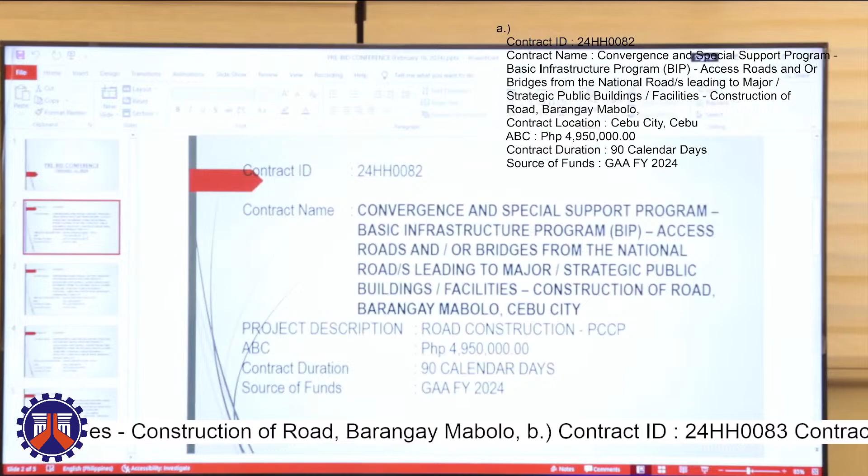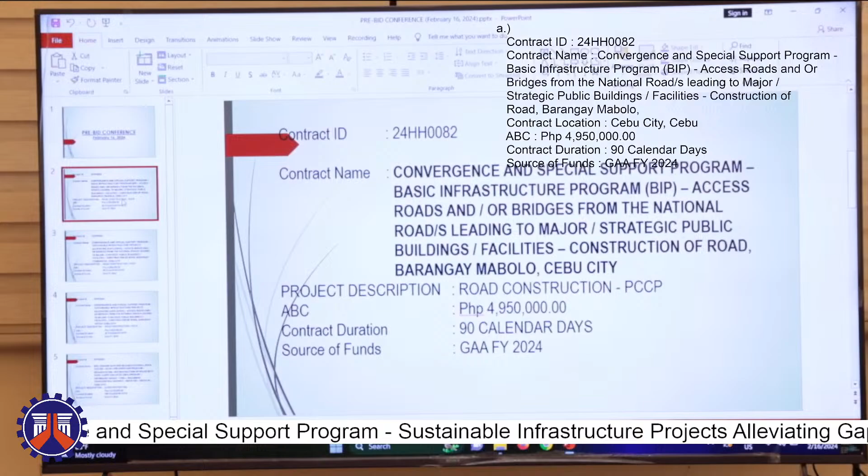First, for contract ID 24HH0082, with contract name Convergence and Special Support Program, Basic Infrastructure Program, Access Roads and/or bridges from the national roads leading to major strategic public buildings and facilities, construction of road, Barangay Mabolo, Cebu City, with ABC amounting to 4,950,000 and contract duration of 90 calendar days.

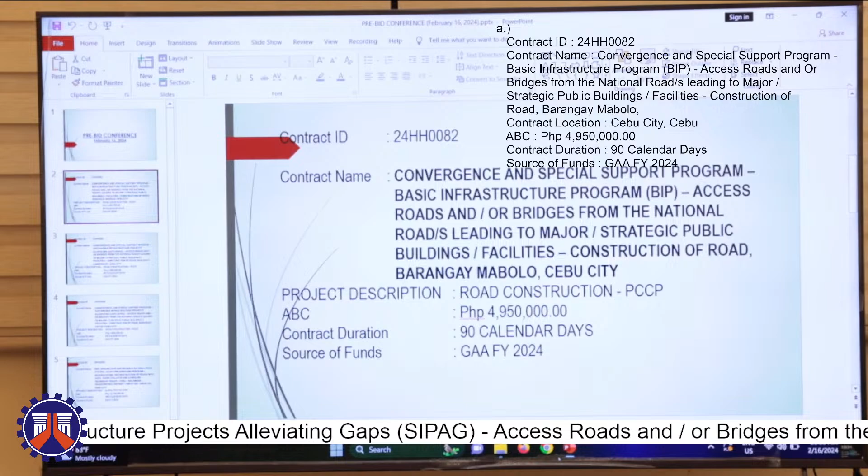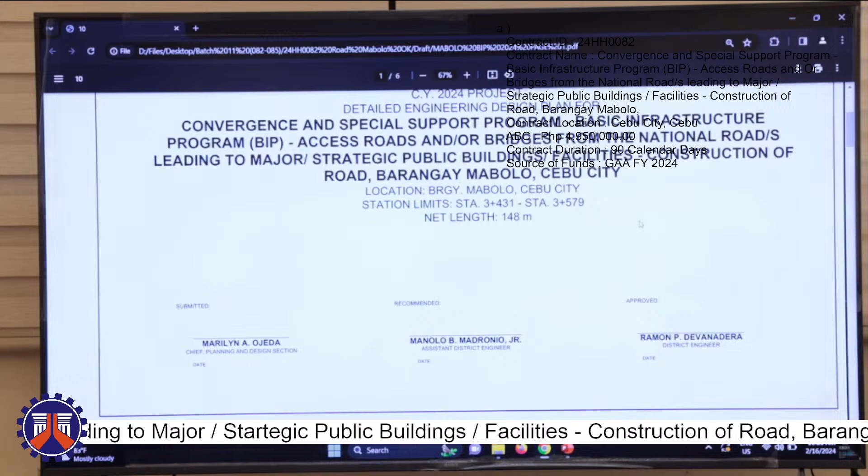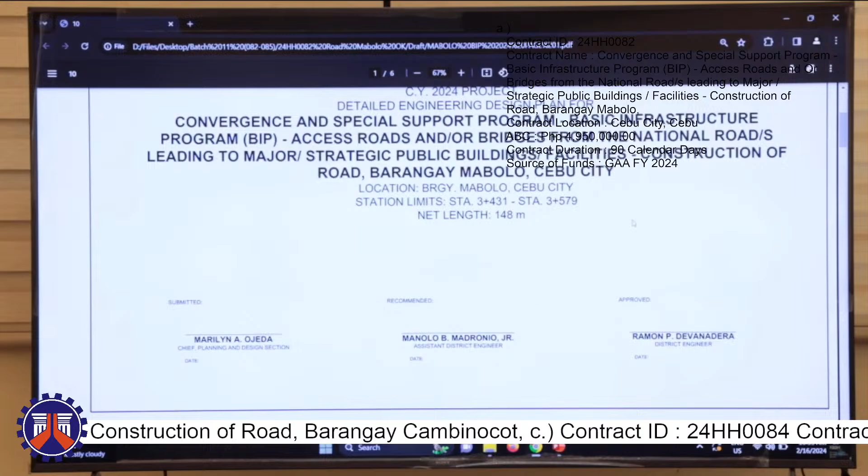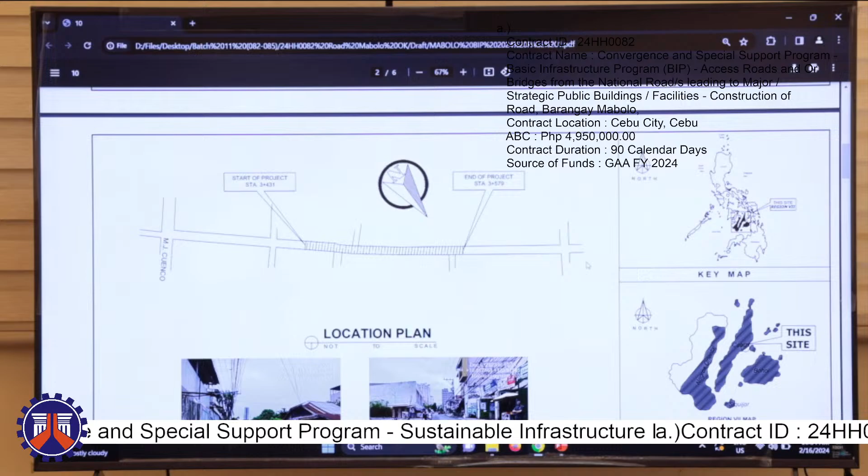For the detailed design plans, we have station limits from 3,431 to 3,579, with a net length of 148 meters. The location connects to the last project, I think from 2022 and 2021. It passes near the area of BDO and Metrobank in Mabolo.

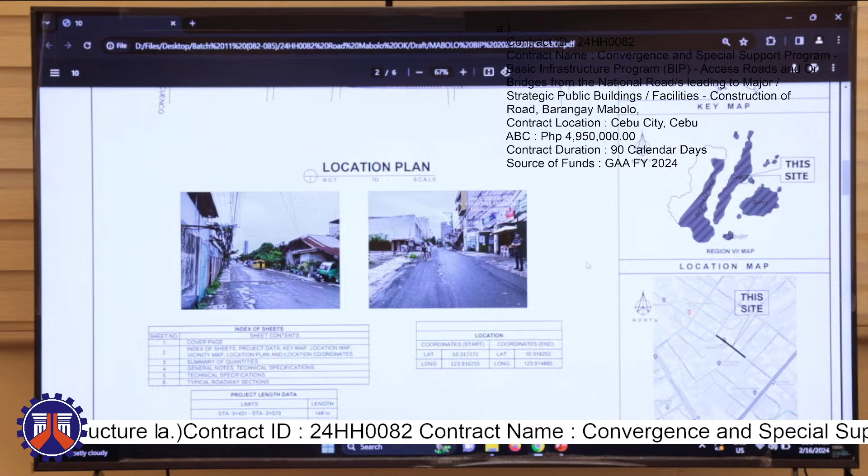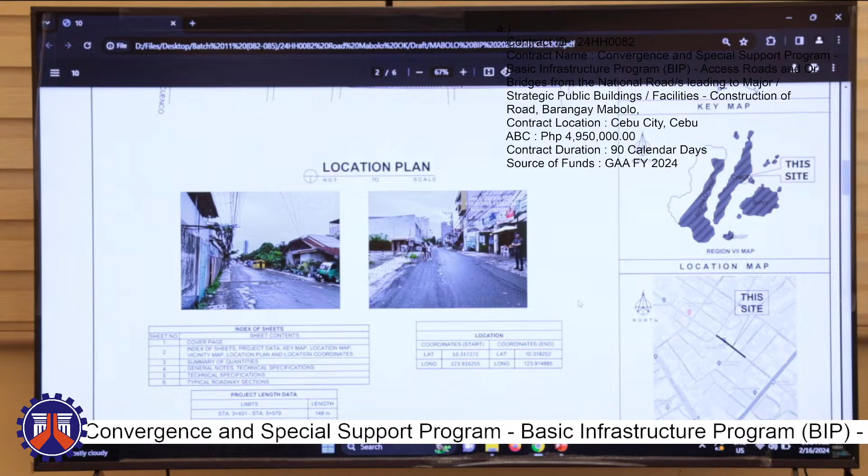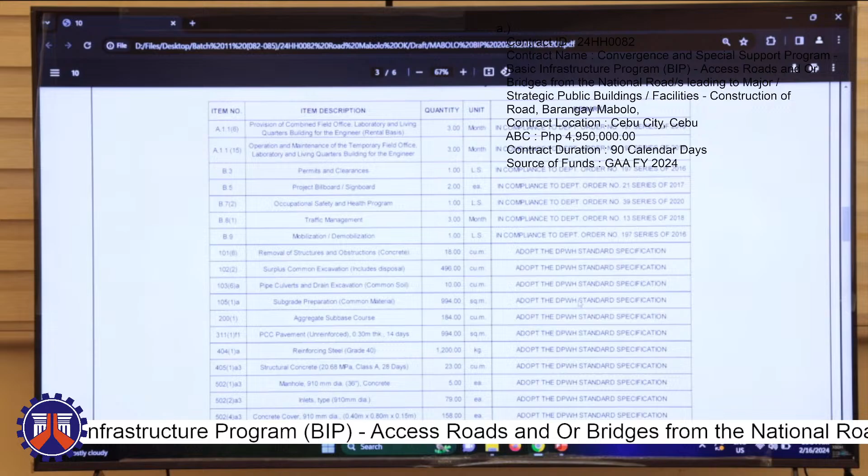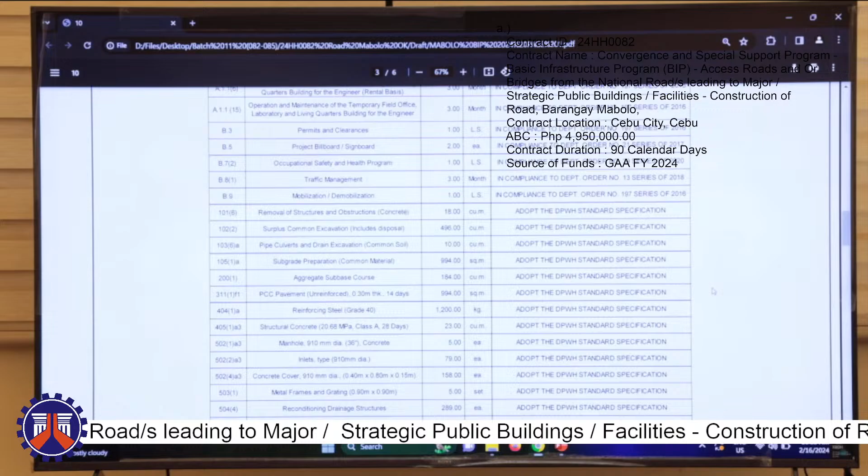If the contractor wants to visit, they can go to this location using the coordinates, or they can coordinate with the planning office to be accompanied. For the summary of quantities: provision of combined field office, operation and maintenance of the temporary field office, permits and clearances, project billboards, occupational safety and health program, traffic management, mobilization, demobilization, removal of structures and obstructions, surplus common excavation, pipe culverts and drain excavation, subgrade preparation, aggregate subbase course, PCCP with 300mm thickness, reinforcing steel bars, structural concrete, manholes, inlets, concrete cover, metal frames, reconditioning of drainage structures, and lastly the curb and gutter.

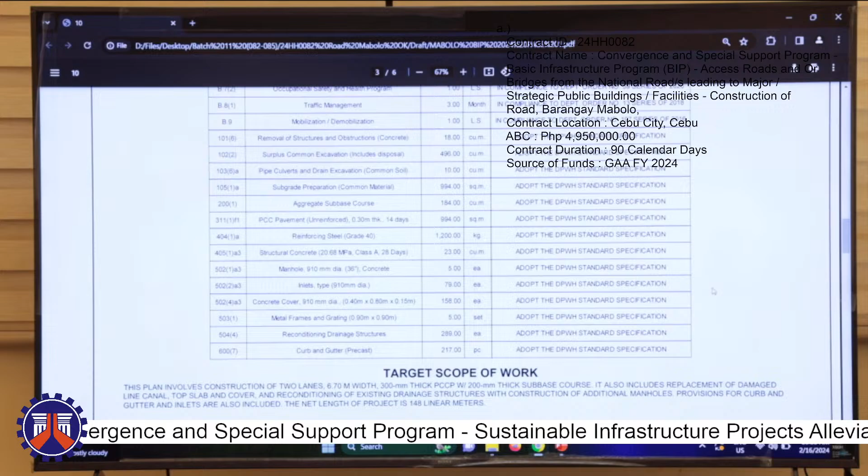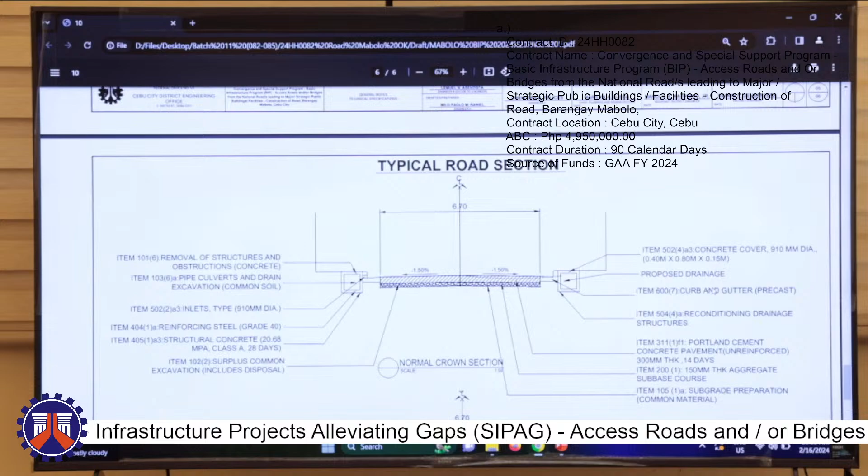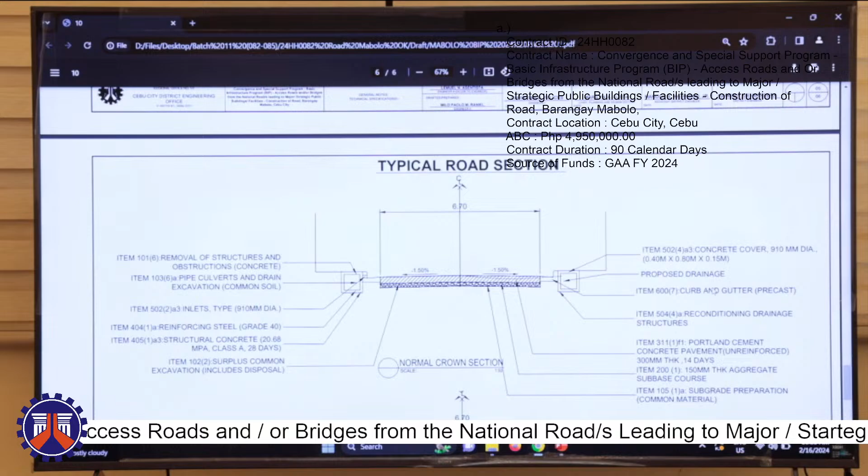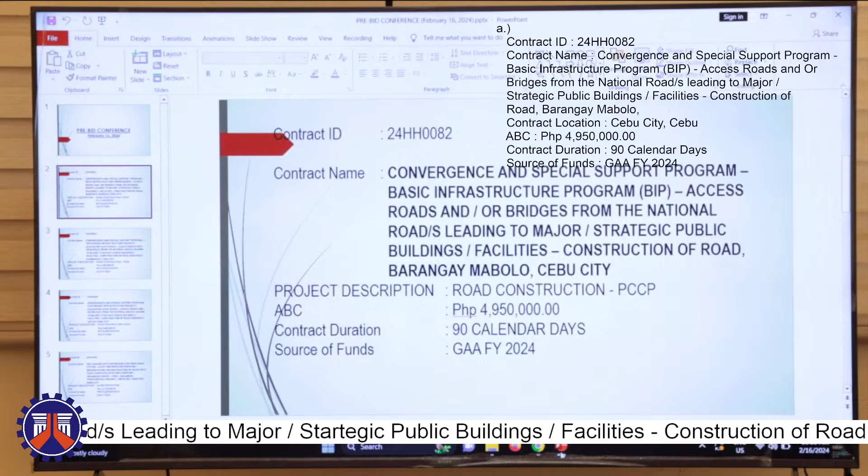For the typical cross-section, we have a 6.7 meter width for our PCCP, and we also have curb and gutter on both sides, as well as our drainage system. That's for contract ID 24HH0082. Let's go to the next project.

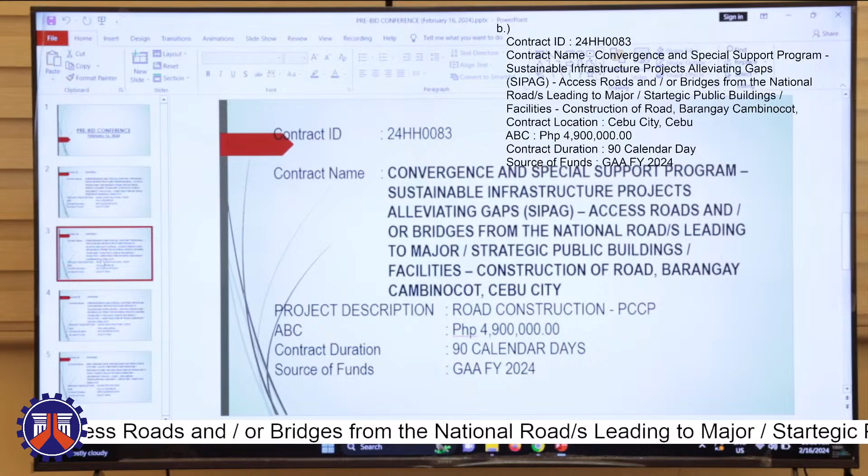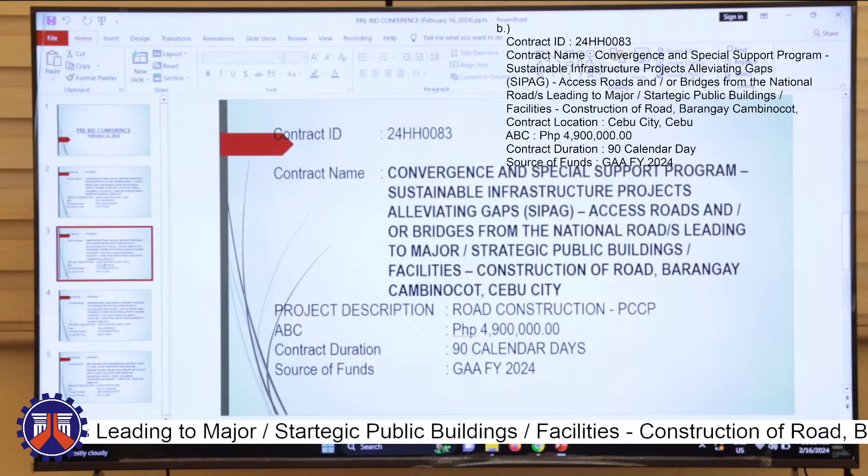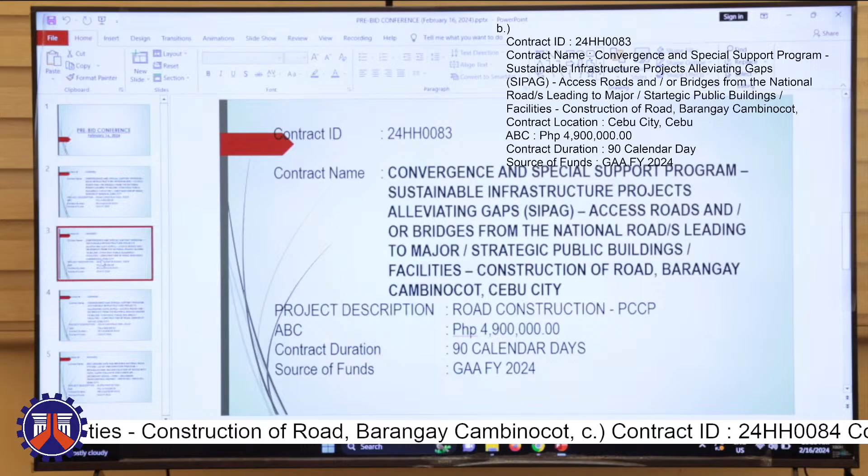Contract ID 24HH0083, with contract name Convergence and Special Support Program, Sustainable Infrastructure Projects Alleviating Gaps, Access roads and/or bridges from the national roads leading to major strategic public buildings and facilities, construction of road, Barangay Cambinocot, Cebu City. We also have an ABC of 4,900,000 with a contract duration of 90 calendar days.

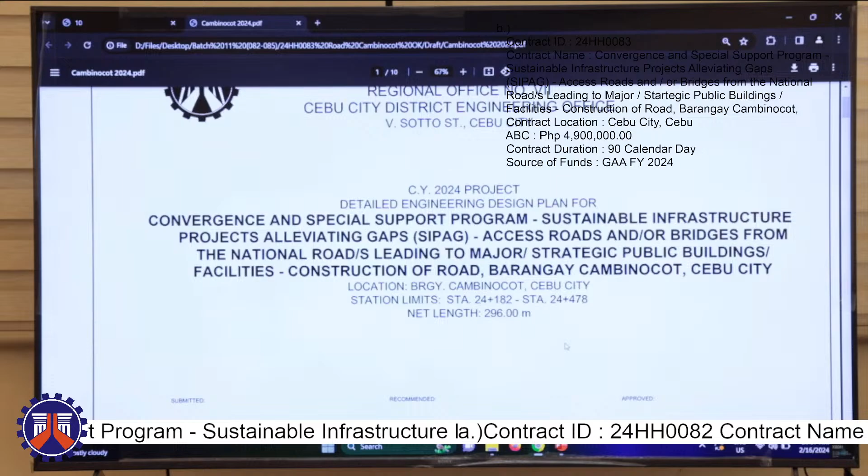For the detailed design, we have station limits of 24,182 to station 24,478, with a net length of 296 meters. For the location, we don't have well-known establishments nearby. This connects to our 2021, 2022, and 2023 projects, ahead of where the Barangay Hall is.

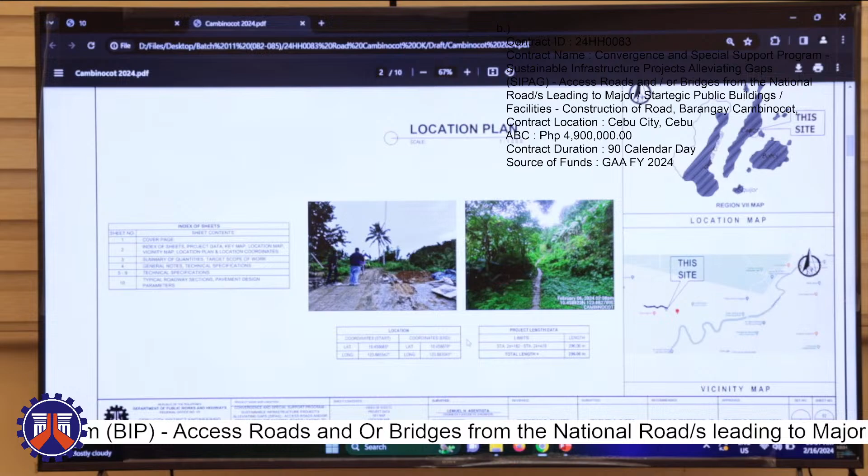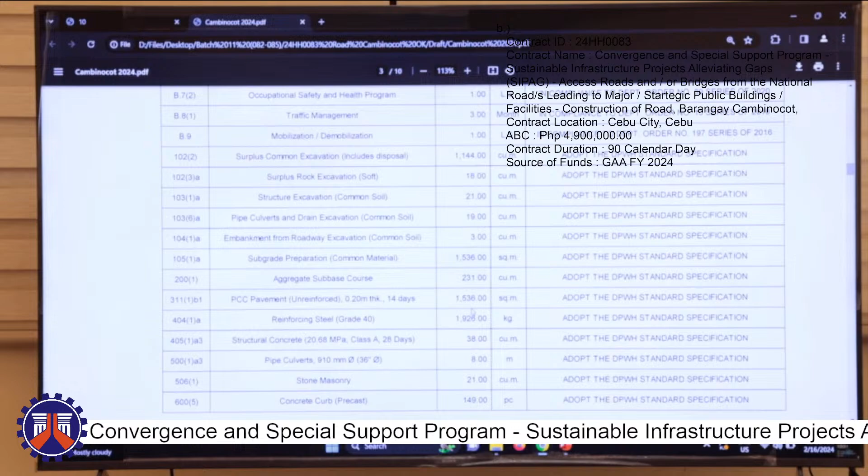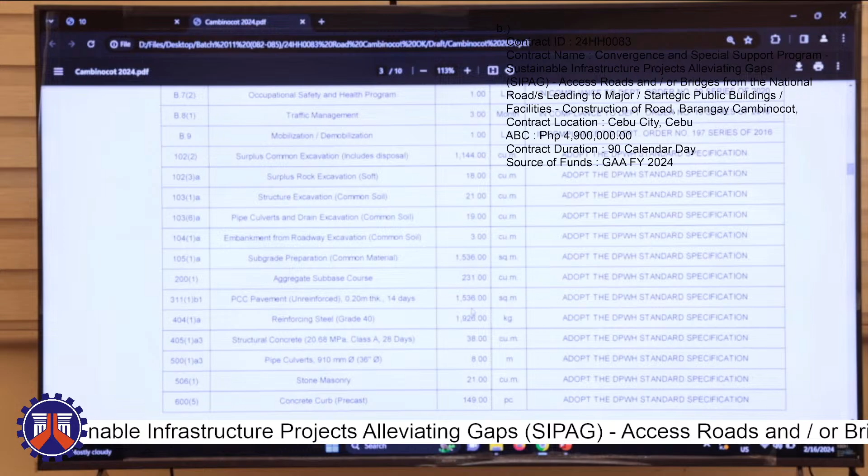As I mentioned earlier, we have coordinates for the location if ever the contractors want to inspect or do a site visit, and they can also ask someone from planning to accompany them. For the summary of quantities: provision of combined field office, permits and clearances, project billboards, occupational safety and health program, traffic management, mobilization, demobilization, surplus common excavation, surplus rock excavation, structure excavation, pipe culverts and drain excavation, embankment from roadway excavation, subgrade preparation, aggregate sub-base course, PCCP pavement 0.2 meter thick, reinforcing steel bars, structural concrete, pipe culverts 36 inches diameter, stone masonry, and concrete curb precast.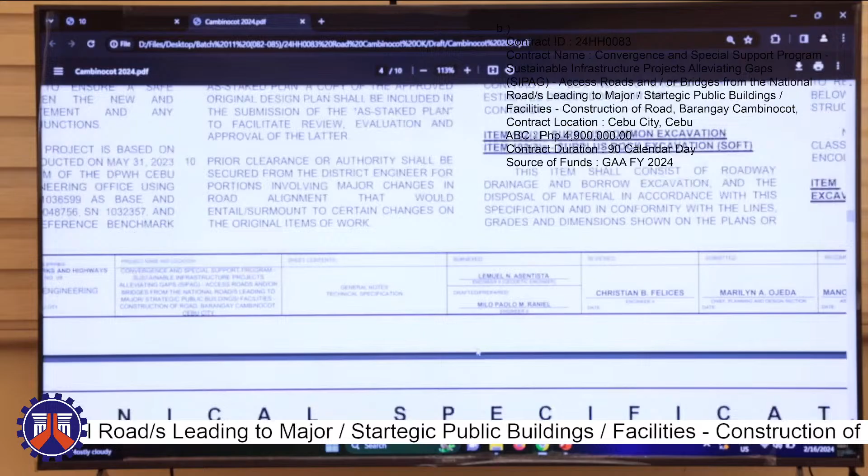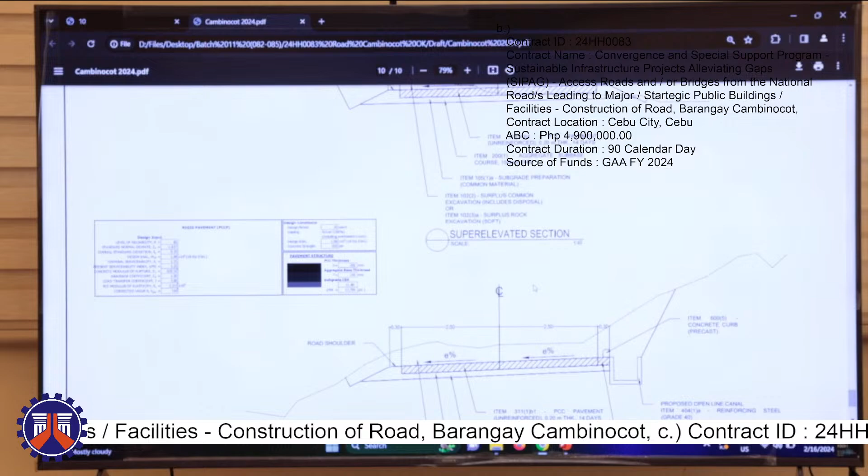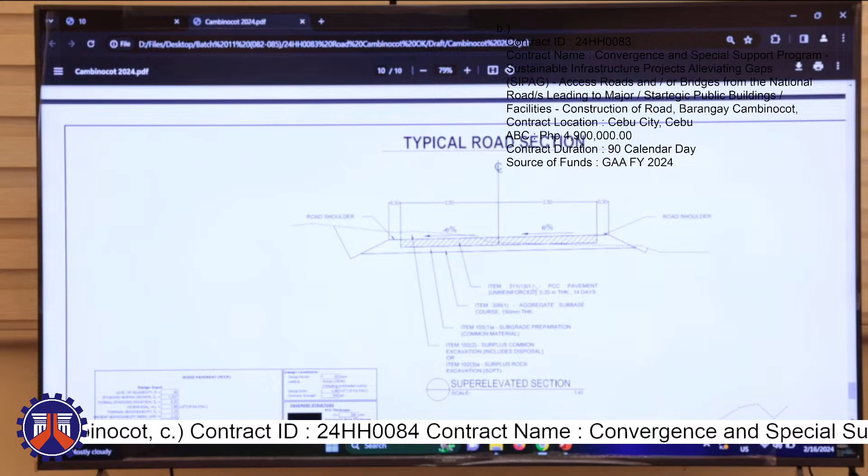So for the typical road section, we have a 5 meter width, then we have a side ditch, and we also have a road shoulder of 0.3 meters.

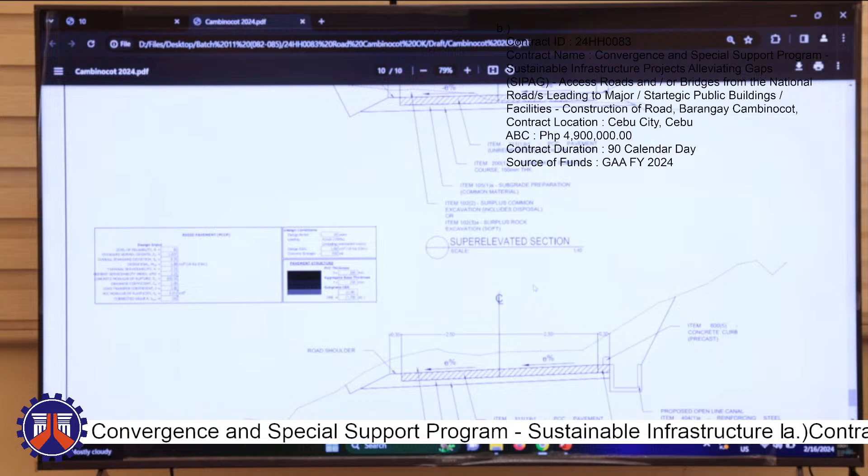Okay, we also have some portion of the projects. We also have the open line canal at the side with concrete curb, precast.

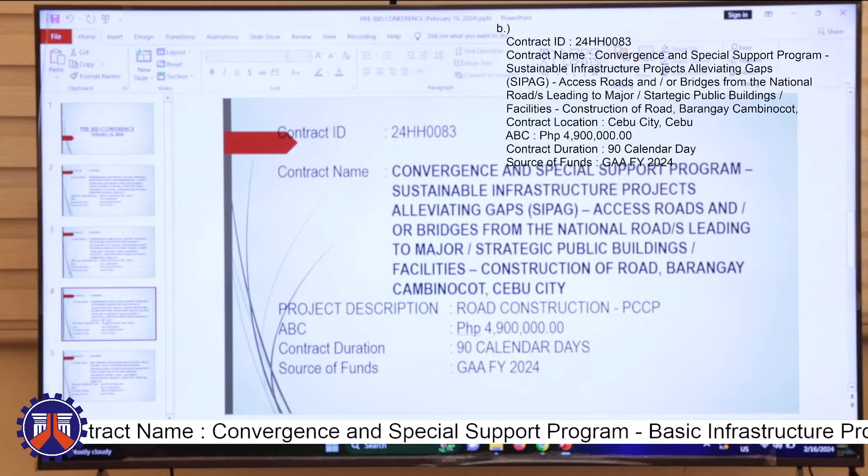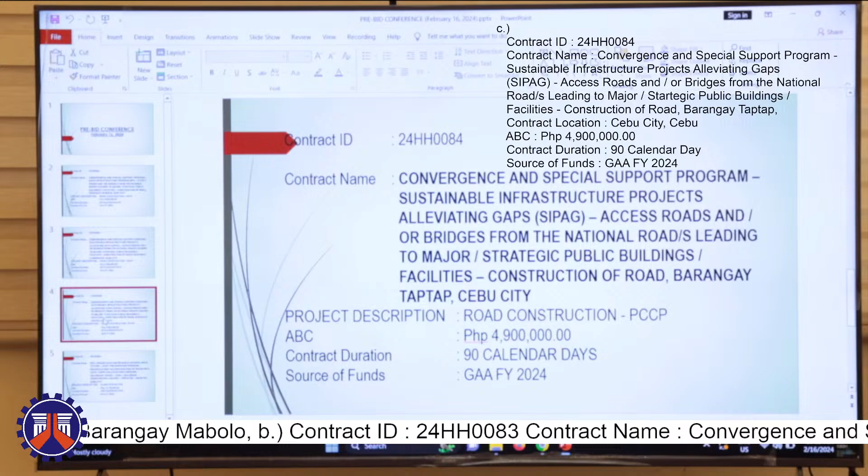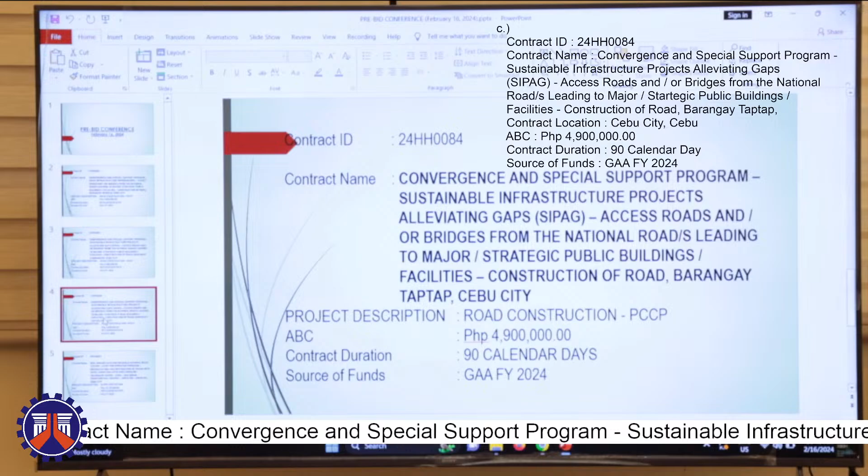Convergence and Special Support Program, Sustainable Infrastructure, projects alleviating gaps, access roads and or bridges from the national roads leading to major strategic public buildings and facilities, construction of road, Barangay Taptap with ABC amount of 4,900,000. Contract duration 90 calendar days.

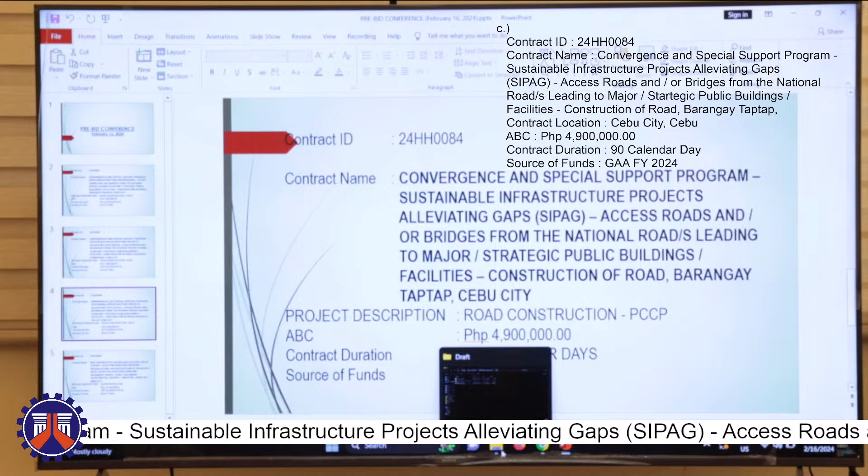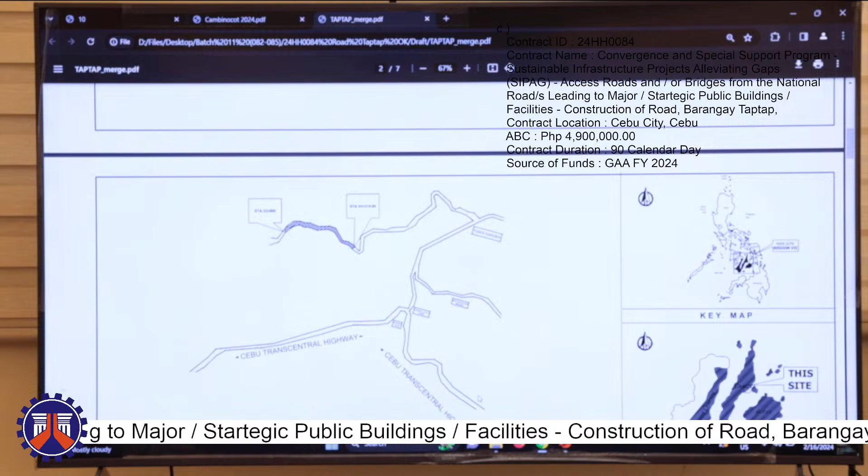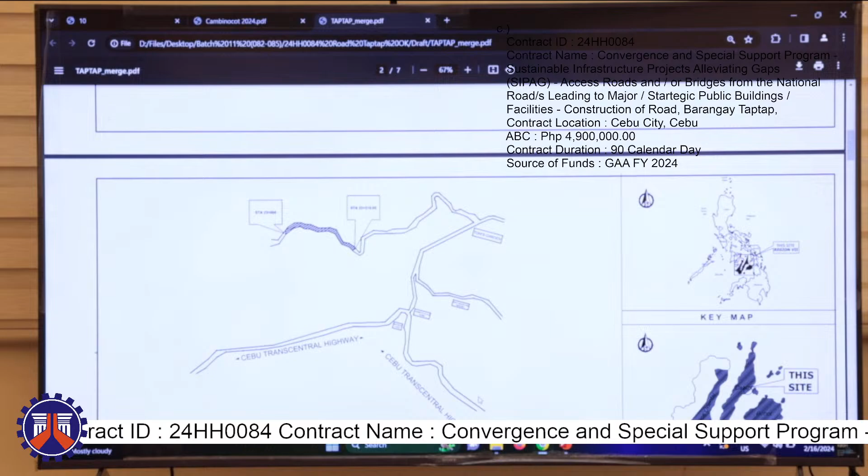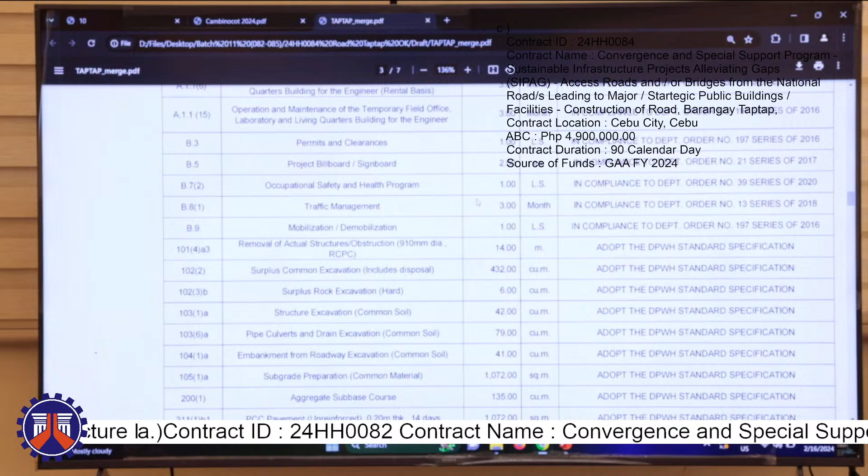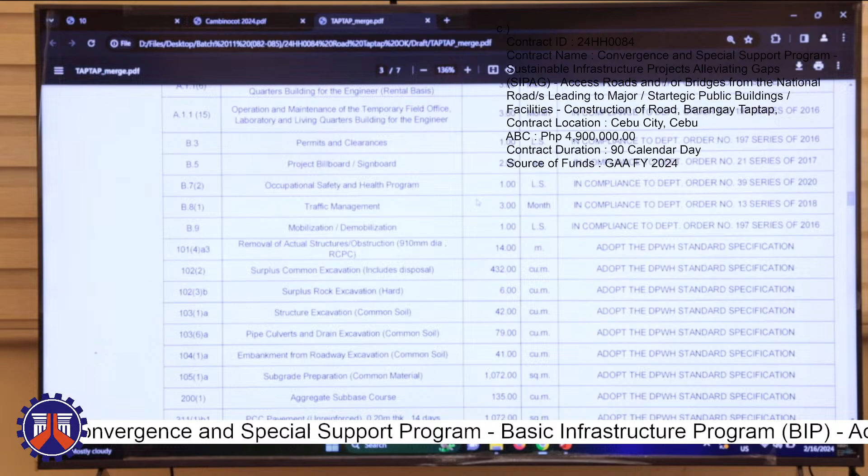So for the summary of quantities, we have provision of combined field office, operation and maintenance of temporary field office, permits and clearances, project billboards, occupational safety and health program, traffic management, mobilization, demobilization, removal of actual structures, obstruction, 910 mm diameter RCPC, surplus common excavation, surplus rock excavation, structure excavation, pipe culverts and drain excavation, embankment from roadway excavation, subgrade preparation, aggregate sub-base course, PCCP 200 mm thick, reinforcing steel bars, structural concrete, pipe culverts 36 inches diameter, stone masonry, and concrete curb precast.

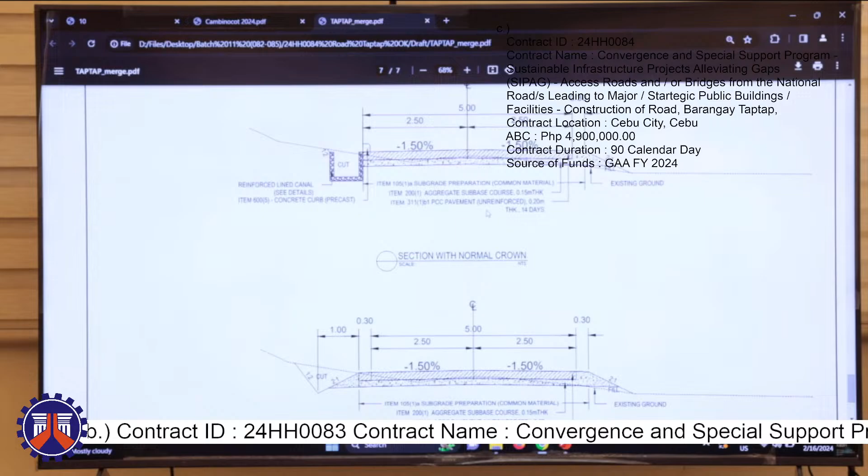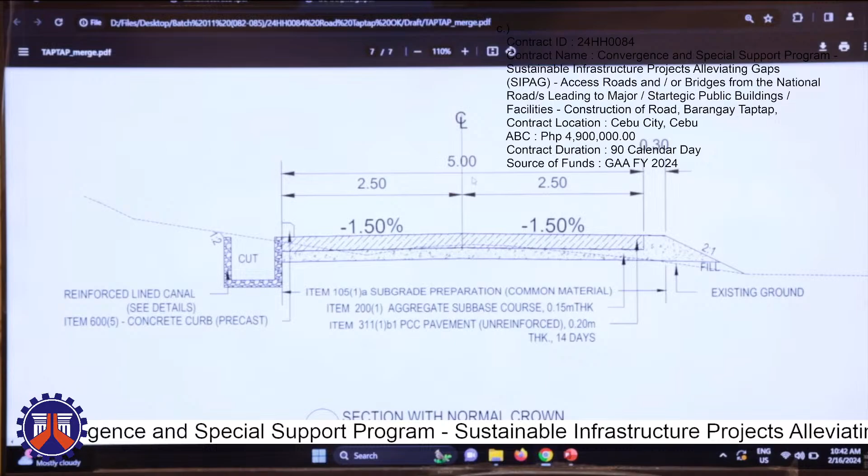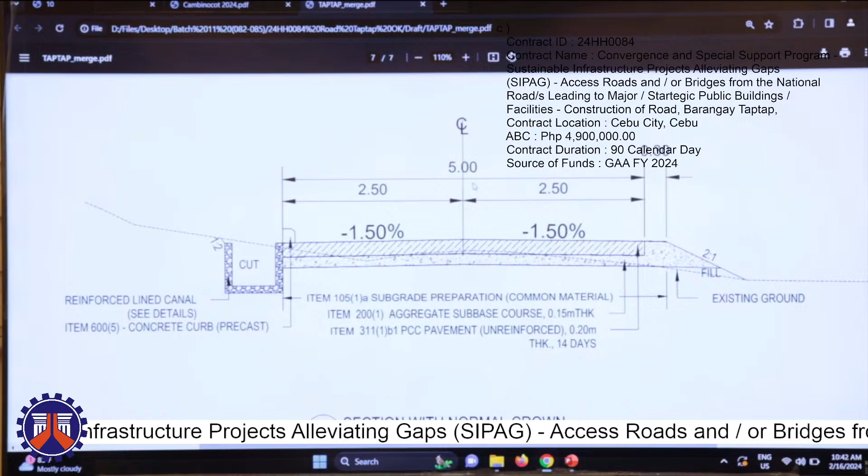Okay, this is our typical road section. We have 5 meter width. We also have a reinforced lined canal at the left side, with precast concrete curb. And also on the right side we have a 0.3 meter shoulder, then a side ditch. There is a picture.

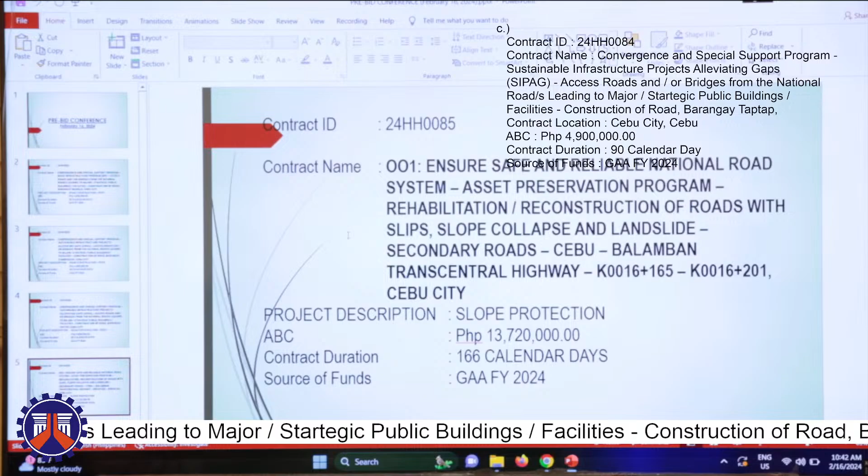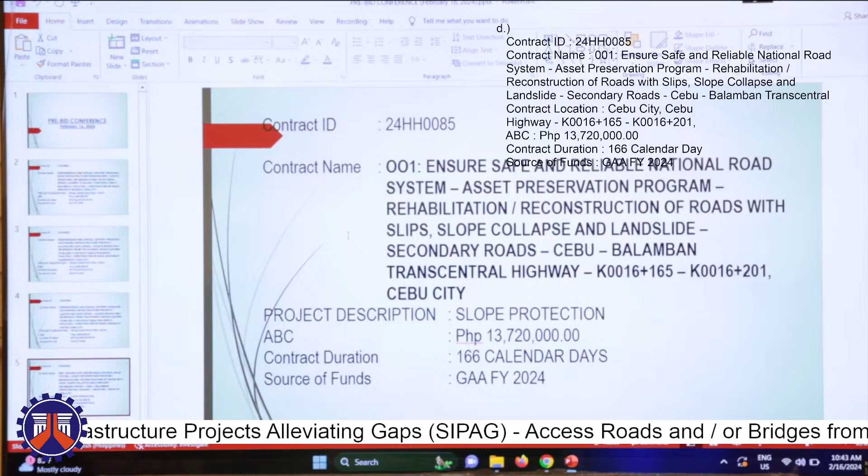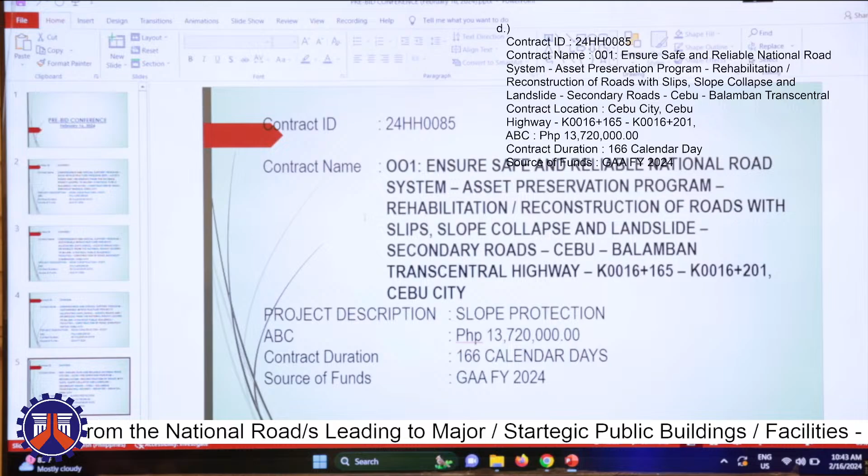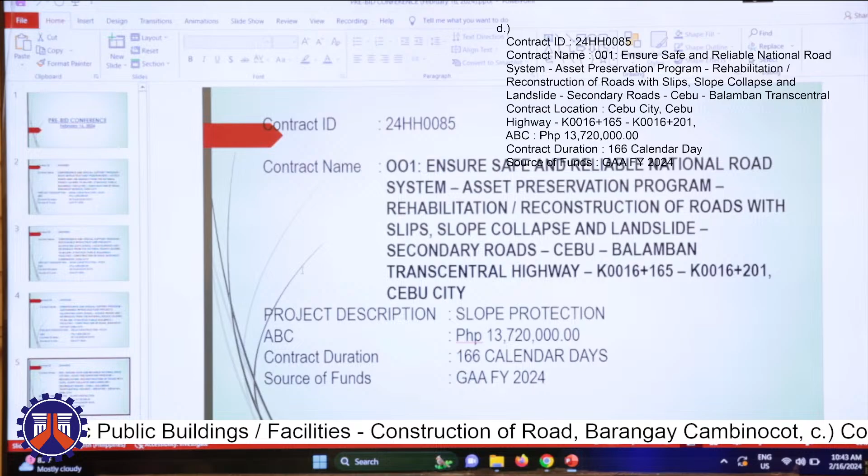For the last project, contract ID 24HH0085, ensure safe and reliable national road system, asset preservation program, rehabilitation, reconstruction of roads with slips, slope collapse, and landslide, secondary roads, Cebu, Balamban, Transcentral Highway, kilometer 16,165 to kilometer 16,201. Project description: slope protection, ABC amount of 13,720,000 with contract duration of 166 calendar days.

For the DED, okay, so the station limits are kilometer 16,165 to kilometer 16,201. So the net length is only 36 meters.

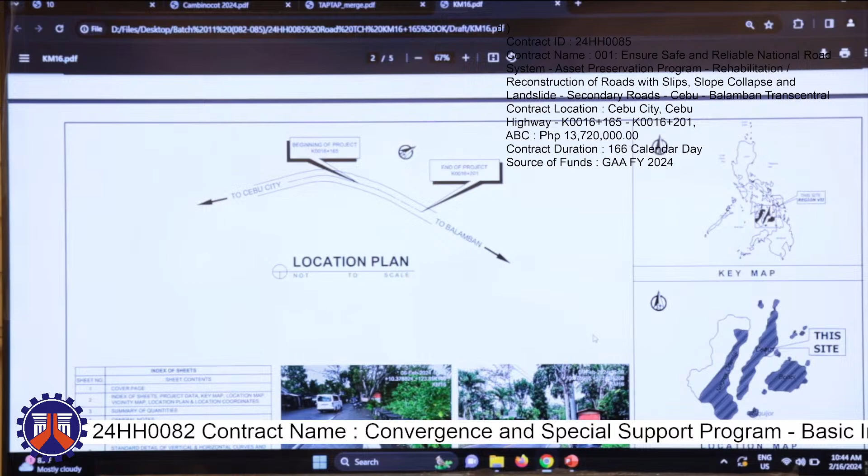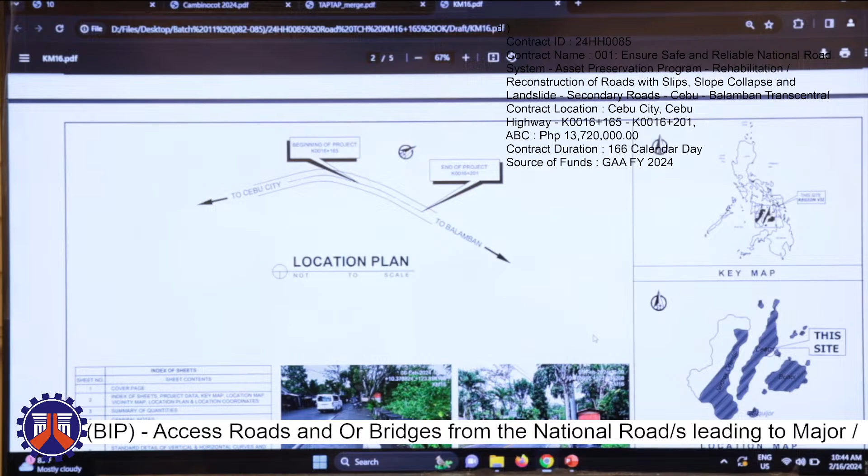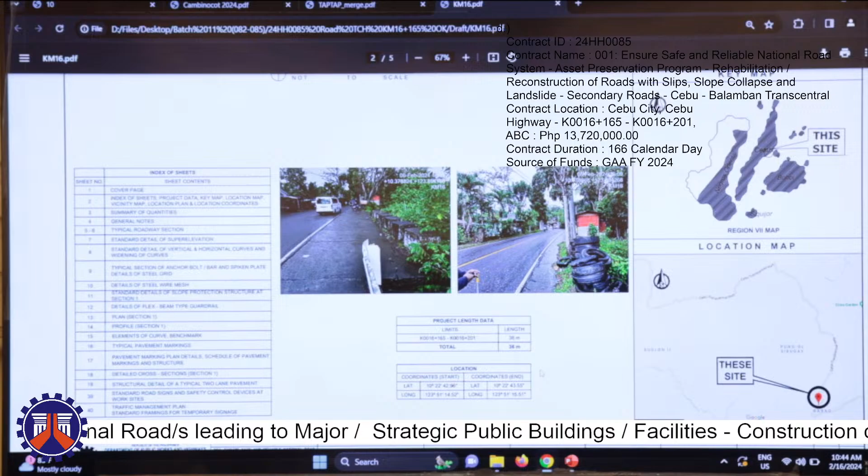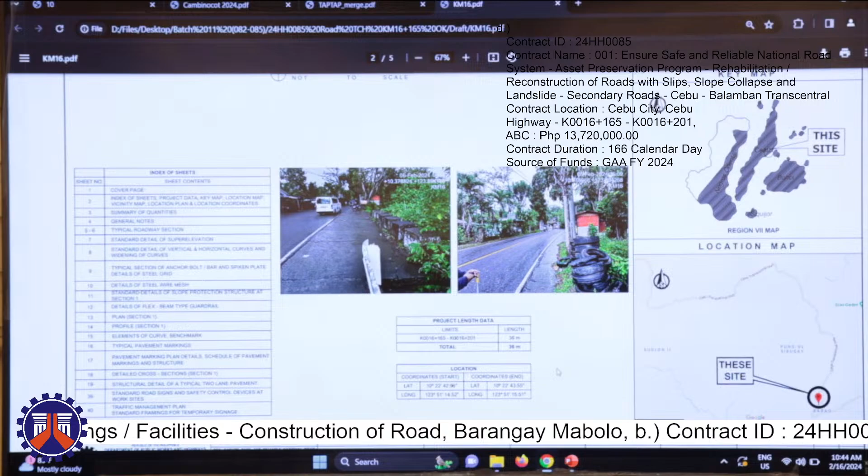Then, the location of the project connects to the previous road slip project. The location is before reaching the Babag High School, then after the area that collapsed, a bit further from the Bonbon road. So if a contractor wins this, we have the location and pictures to guide them to the area, and they may also be accompanied by planning people who know the site.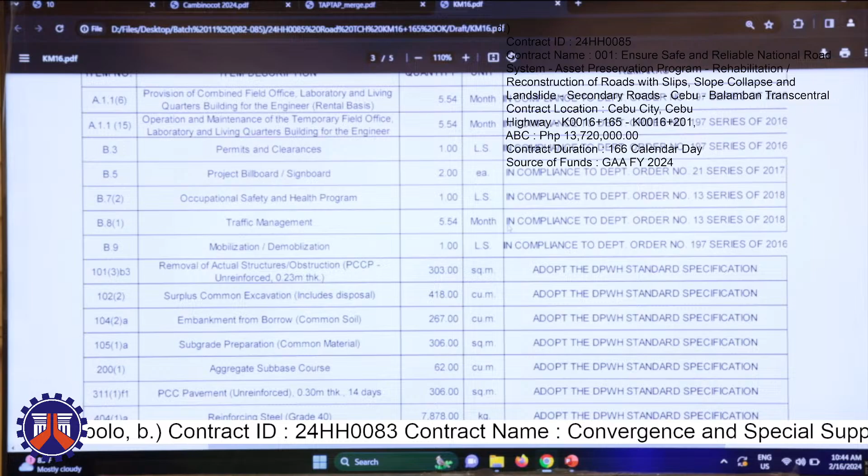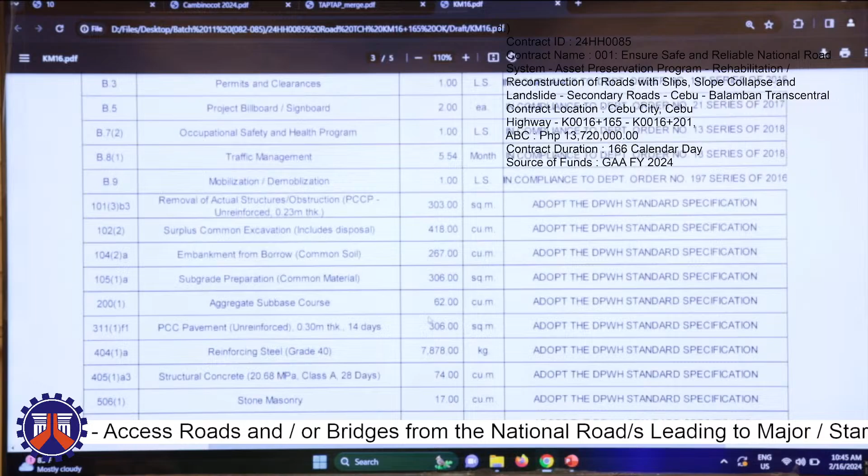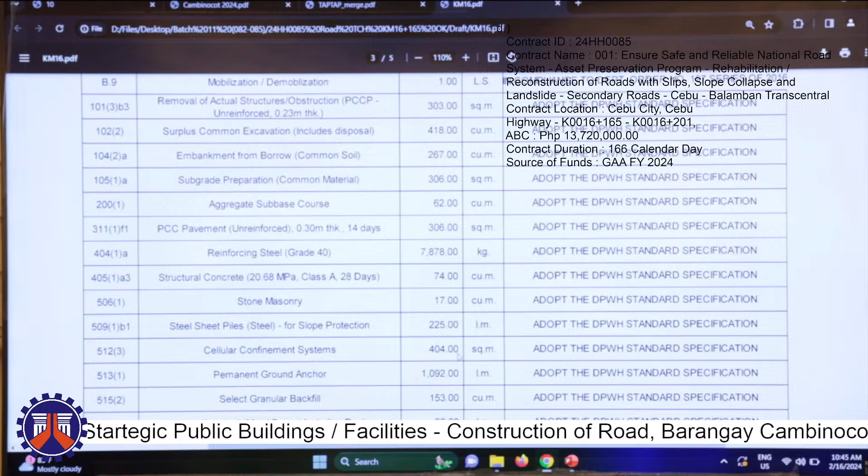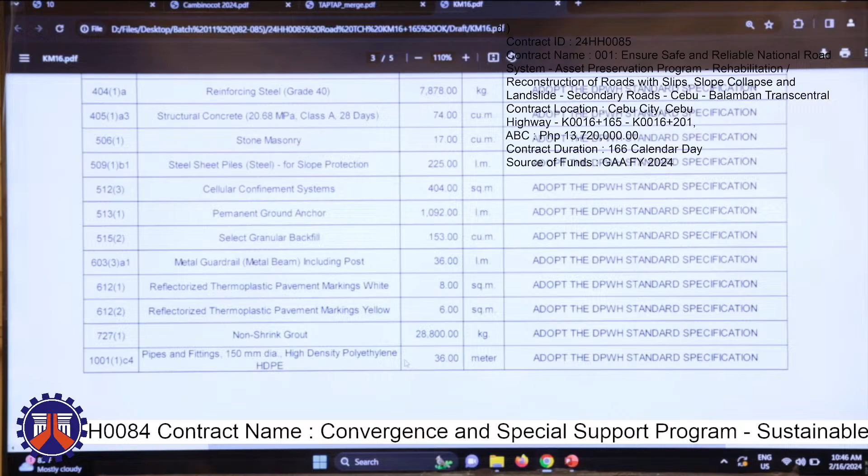Then for the summary of quantities: combined field office, operation and maintenance of temporary field office, permits and clearances, project billboard, occupational safety and health program, traffic management, mobilization and demobilization, removal of actual structures and obstructions, PCCP unreinforced 230 mm thick, surplus common excavation, embankment from borrow, subgrade preparation, aggregate sub-base course, PCCP 300 mm thick, reinforcing steel bars, structural concrete, stone masonry, steel sheet piles for slope protection, cellular confinement system, permanent ground anchor, select granular backfill, metal guardrail, metal beam including posts, reflectorized thermoplastic pavement markings white and yellow, non-shrink grout, pipes and fittings 150 mm diameter HDPE (high density polyethylene).

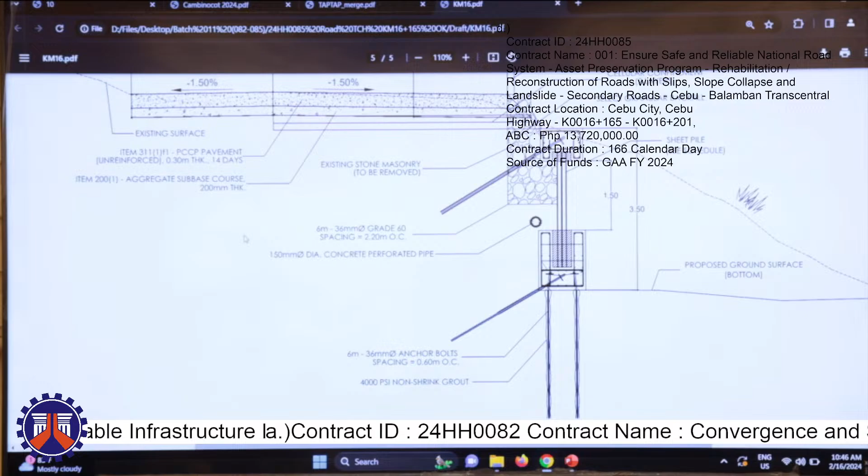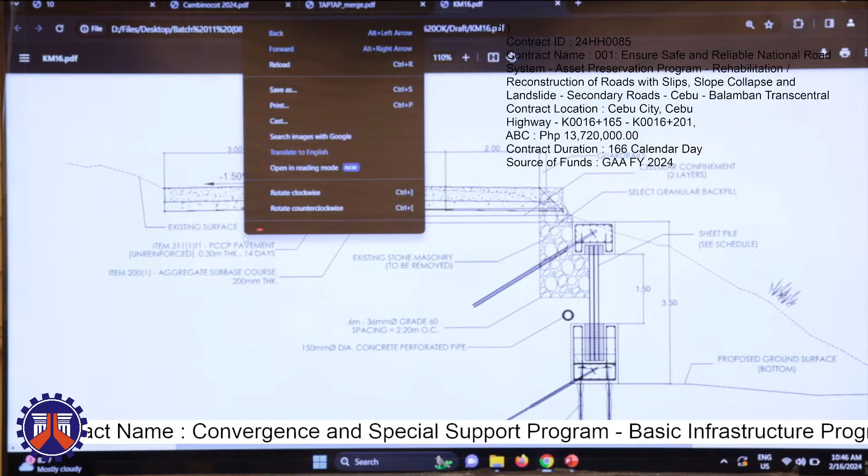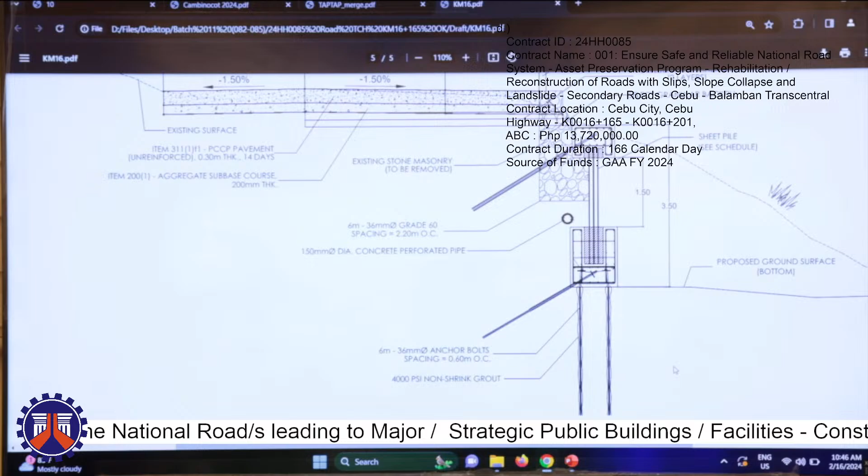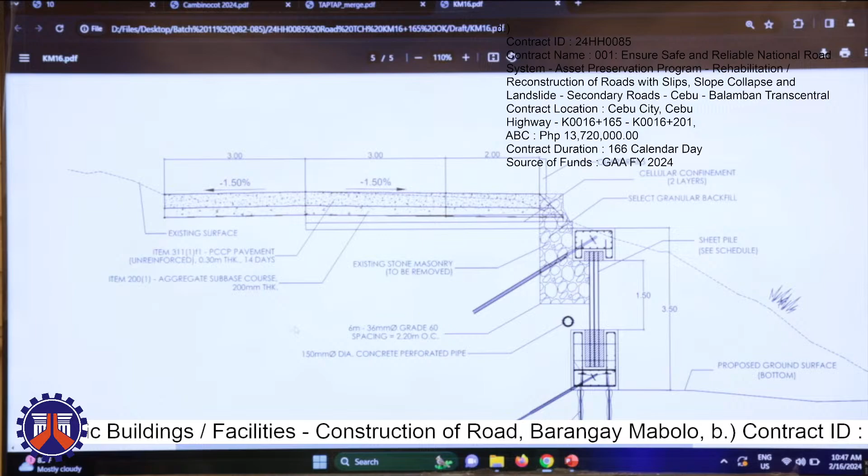Then for the typical roadway section, so this area had a slip. We will demolish the dilapidated PCCP that had the slip. Then we will put protection on the right side - steel sheet pile with concrete capping. Then at the bottom side we have ground anchor bolts, ground anchor bolts, then non-shrink grout. Then on the top side we have stone masonry. Then the PCCP pavement we removed, we will replace it with 300 mm PCCP.

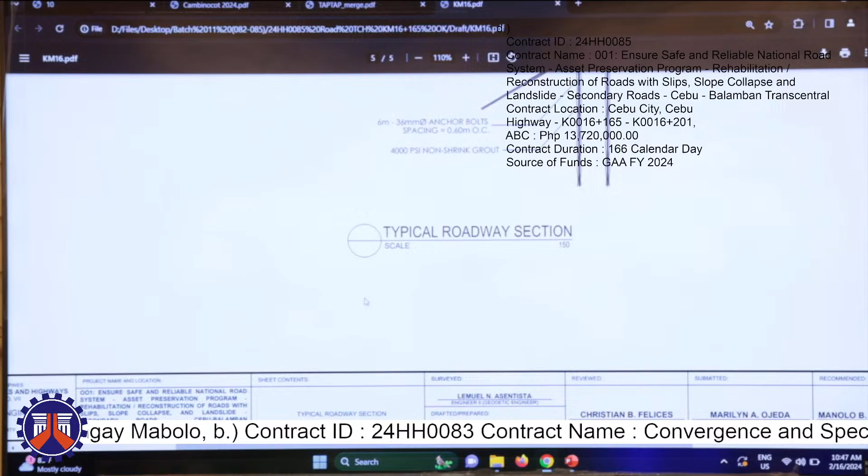Okay, I think that's all. Sir Ernst? I'm good. That's all for the planning.